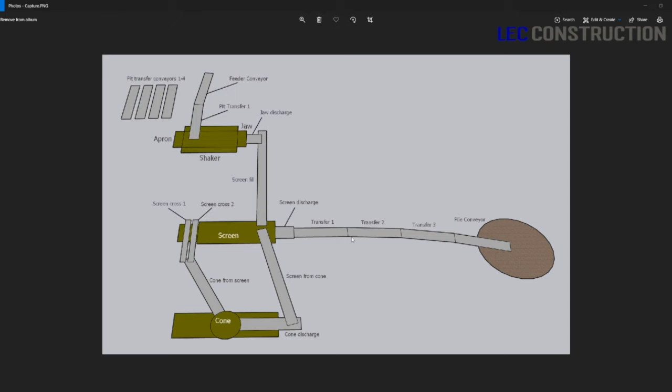Here you can see an overview of our pit setup right now. The only differences are that we don't have the option to add these conveyors yet. All we're doing is dumping directly into the apron feeder and the jaw shaker right here. But eventually we're going to add in the feeder conveyor and then up to 4 transfer conveyors. And then as of right now we only have 2 transfer conveyors here to go out to the pile.

Here's some pictures from actually out at the mine. This is looking from the pile direction. This is the pile conveyor here. And on the left is the cone crusher, in the middle is the screener, and on the right side is the jaw crusher. Here's another kind of more of a side view going down the pile conveyor line.

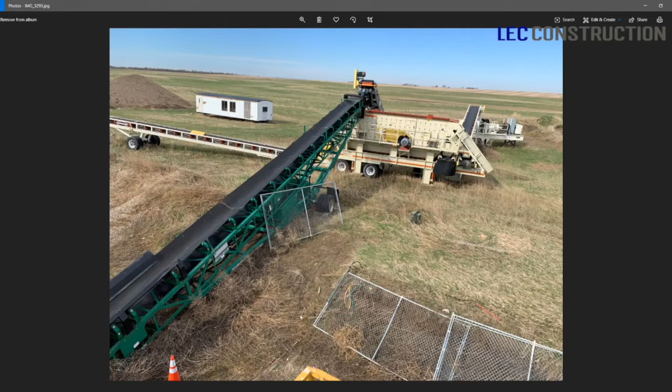And this is looking at the cone crusher here on the left. The conveyor coming out of the cone crusher, going into the screener, and then we have a conveyor coming out of the screener and into the cone. Another side picture on the pile line. And this is looking towards the screener. I'm standing on the jaw crusher, and the cone crusher is on the opposite side here, and we have our job trailer over here.

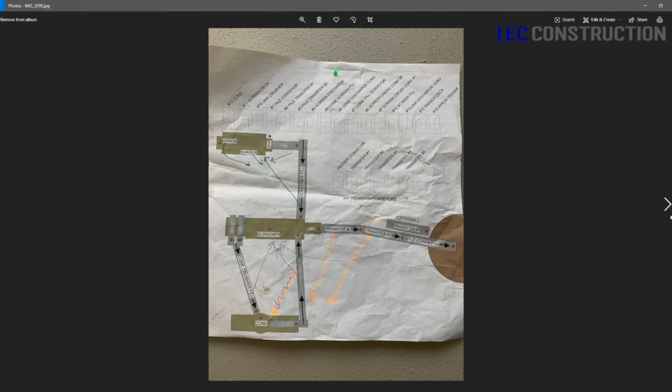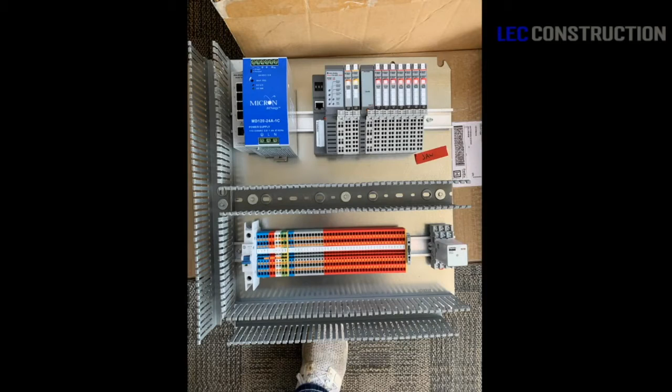This is just a SketchUp of the overview of our gravel pit, and this was a template that was used for one of the cabinets with a bunch of start-stops on it. So when you decide to start a project like this, the first thing you need to do is really just figure out what exactly you want to accomplish. And it varies drastically from one project to another, but we just looked at the hardware that we already had installed out at the mine and decided exactly what we wanted to do.

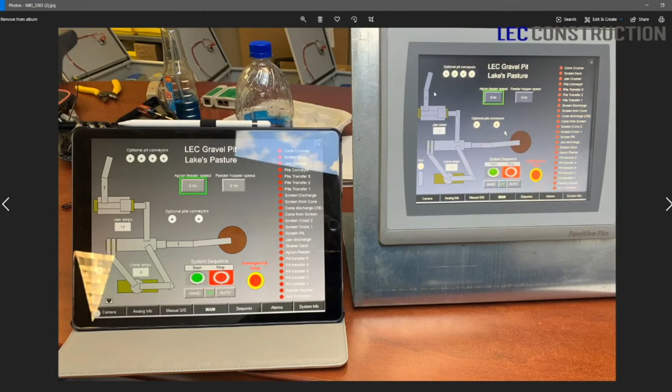And our main goal was to be able to control the pit setup remotely from a wheel loader. And how we decided to do that was with an iPad in the loader, and then a PanelView in the job trailer, and then I just have VNC enabled on the PanelView in order to control it from the loader over a wireless network.

Adding automation to our gravel pit just seemed like a smart choice because we knew that it would make it a more efficient process, and it would just be a more intuitive experience for the operator. The iPad will give our operator an extremely easy way to control and monitor the process and reduce the number of stoppages, and also cut down on the severity of the inevitable stoppages.

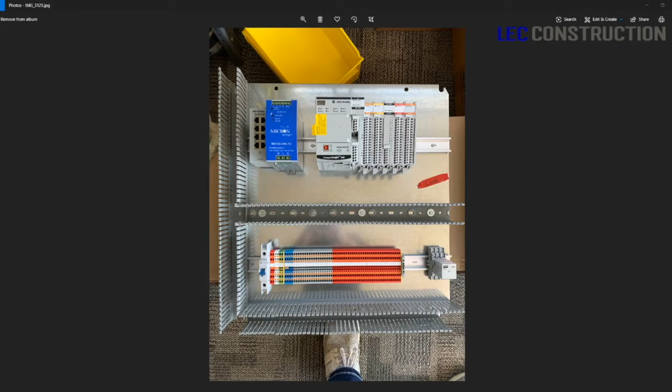After we figured out our main goal for this project, we had to decide on the hardware to complete it. We went with the new 5069 controller from Allen Bradley, and this required buying Studio 5000 since our copy of RSLogix 5000 wouldn't be sufficient. And we also figured out that we needed to place 4 total enclosures by the cone crusher, jaw crusher, screener, and pit conveyor setups. And we decided to go with POINT I/O for the remote racks because they were cheaper and they matched our needs better than the 5069 remote racks.

And as you can see here, I have the main controller. It's a 5069-L306ER, and I just have 2 analog cards here, 2 discrete cards here, and then a field potential distributor, splitting them up since the discrete cards are 120. And I just have a power supply and a switch here, and 1 breaker. I added another one after the fact for 120 volt power. This is for 24, and just a control relay for e-stop power.

And I also decided that I wanted to run every point out to a terminal block, just because it'd be easier to use terminal blocks rather than going directly into the controller every time that you needed to switch something around, and I don't want everybody to have access to possibly messing up the terminals at some point.

And another thing that you really need to consider when you're doing a project like this is enclosure size. As you can see, this one is a little congested, but I definitely wouldn't want it any smaller. But enclosure size is something you really need to consider, because you don't want to pick too small of an enclosure, otherwise you really limit yourself with what you can do in the future without completely going to a bigger enclosure and redesigning your system.

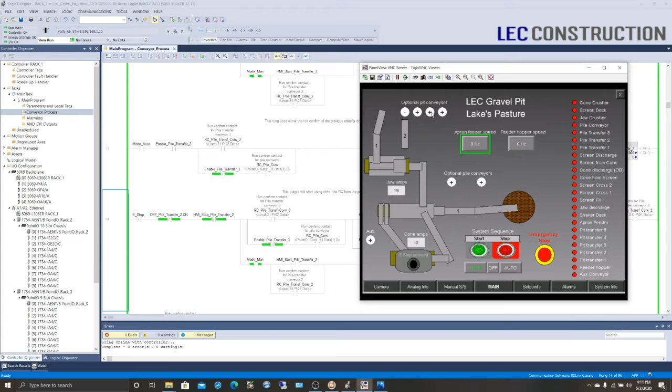After I figured out exactly what we needed for our hardware, I got to work on the programs for the HMI and the PLC. And they both pretty much ended up the way that I wanted them. I had to add the ability to add and subtract optional conveyors in a few different areas. So what I did for that on my HMI was in the pit conveyor setup, you can add up to 4 extra conveyors. You can add up to 2 extra conveyors in the pile conveyor line. And then we have an optional auxiliary conveyor over here that we don't have yet, but we want the ability to add in the future.

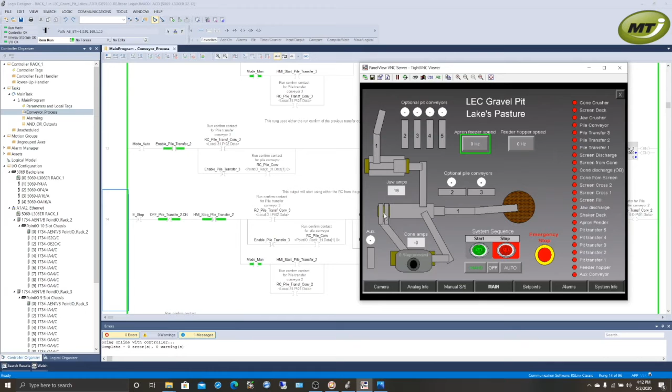And the reason that we'd want to add this auxiliary conveyor is because these 2 cross conveyors can be reconfigured. And right now we just have them set up so they're both feeding into the cone. But if we want to switch them around later and possibly have just an extra rock pile, we can do that, and the auxiliary conveyor will take the pile further away from the screener.

How I did that in my program is I have an enable bit that's controlled by these buttons. So for the pile transfer 2, it would be that bit right there. And it controls whether or not the sequence timer goes. So if you have this conveyor enabled, the timer will go off and it'll start pile transfer conveyor 2. The run confirm from that transfer conveyor will start the timer for transfer 1.

But if that bit is not enabled, as you can see here, it will run off of the pile conveyor run confirm, which is the output before the optional transfer conveyors. And that's how I have it on all of those optional conveyors.

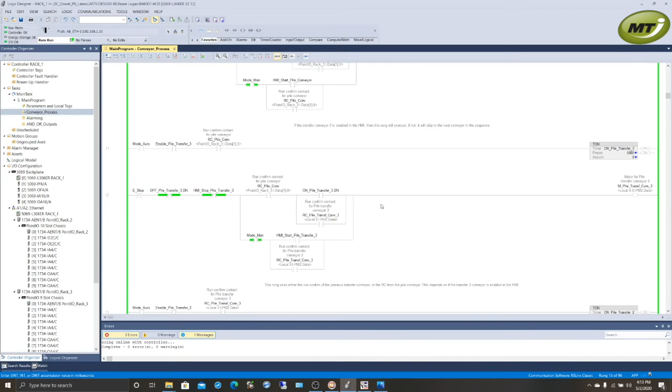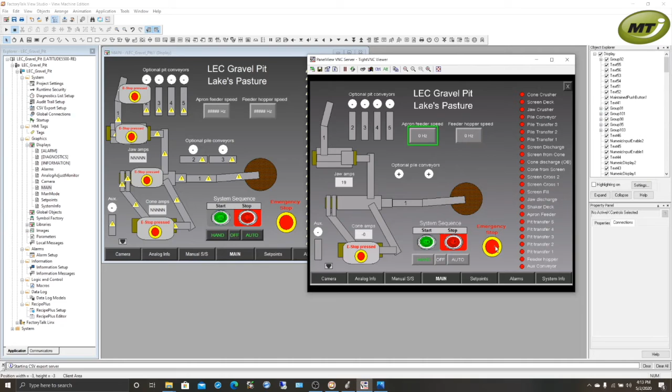Besides that, in my HMI, I've added the ability to stop the outputs from the loader. It's not a true e-stop, but if I press this e-stop, I'll get an alarm that comes up that says e-stop pressed. Obviously it's the HMI e-stop. I can go ahead and reset that. But if I press an e-stop on one of my enclosures, this is what it gives me. I have it programmed so it'll show up an alarm. So right here you can see cone crusher cabinet e-stop pressed. I had already acknowledged it.

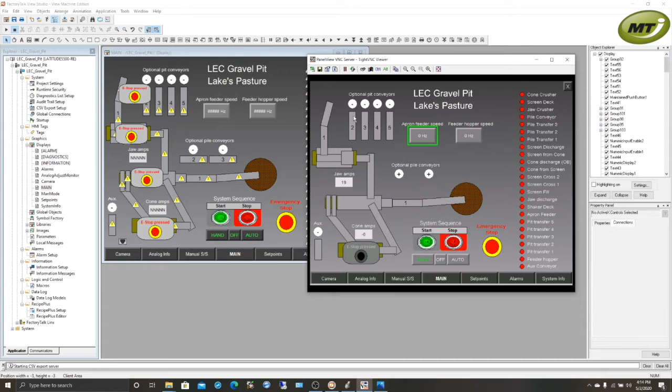And it'll give you a little banner on the actual location that the e-stop was pressed. So in this case, it's on the cone crusher. It could be on the screener or on the jaw crusher, or the pit conveyor control cabinet.

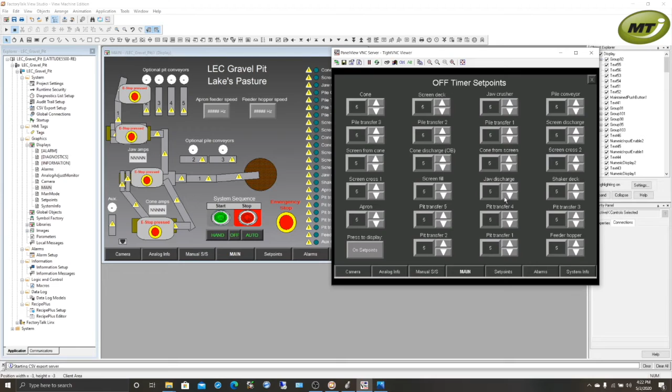Some other areas that I focused in on the HMI: I added the ability to put the system into either auto or manual mode from the main screen. You can also start or stop the system sequence. I've also added the ability to change the on timer and off timer set points for each output. Just a general alarming page. And I've also added a system information page to give the operator a little bit more information about what's going on.

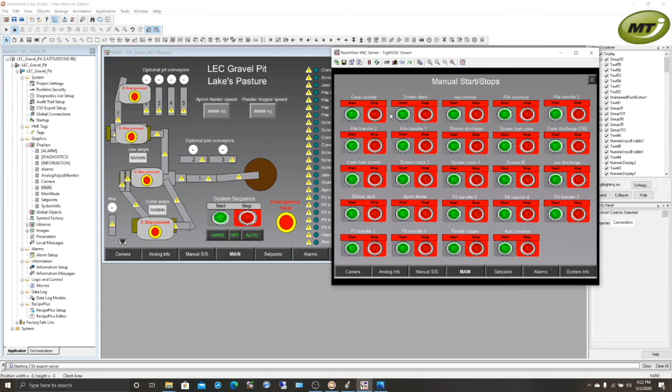If your system is in manual mode, you can go to the manual start stop page and manually control each output. If the output is off, it'll give you this red banner. If it's on, it'll give you a green banner.

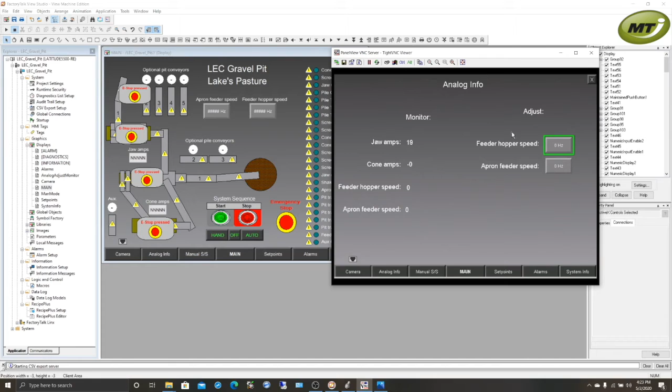I've added an analog info page that gives you a little bit of information about the 4 different analog inputs and outputs we have in the system. And it also gives you the ability to adjust the speed of the 2 VFD controlled outputs. Just click on the field here and you can enter whatever measurement you want. You can also do this on the main page. You've got the speed adjustments here and then the 2 amp meter readings here.

I also added a camera page, but it's currently not running yet because we don't have a camera installed. And then on each page, you probably notice that I have this Ethernet port flashing, and that's just to give the operator a little heads up if he has any connection issues from the HMI to the PLC.

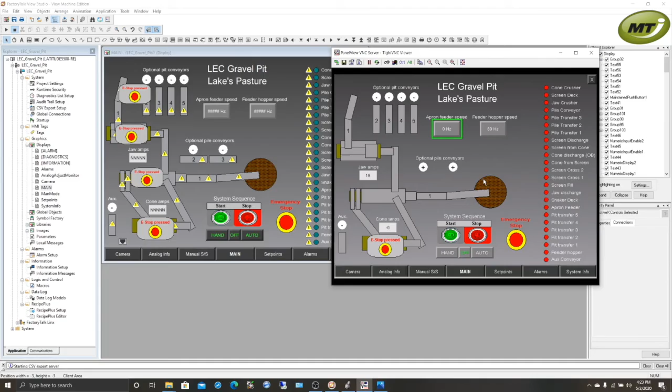One troubleshooting aspect that I added to my HMI would be with overload conditions. If I switch over to FactoryTalk here, go to my main page, you'll see all these caution symbols, and say the overload trips on the screen deck. This caution symbol will come up here, but it'll also pop up on the screen deck itself. So it's just kind of one way to show the operator exactly where the issue is and what it is really.

And also in the sequence, if an overload condition exists before the system starts, obviously the sequence will stop at that point. It won't start the conveyor after it until the current conveyor selected starts. And if it happens during operation, which is obviously when it would normally happen, that output will shut off, but it'll also shut off every output in front of it in line, just so you don't have a pile-up condition where you're starting to bury a conveyor or something like that.

It took a little bit of thinking to finally decide on the setup for HMIs. I thought about using FactoryTalk ViewPoint on an iPad, and then possibly using a Microsoft Surface in the loader as a standalone HMI, or putting a PC in the job trailer with an ME station license. But I ended up deciding to put a PanelView Plus in the job trailer and the iPad in the loader with VNC into the PanelView.

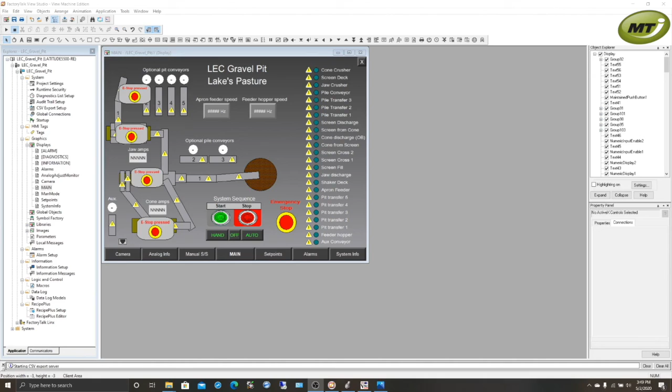The main concern that I have at this point is that my wireless access points aren't going to have a reliable enough connection to keep connection with the iPad and the loader. They're supposed to have a range of 300 feet, clear line of sight, and I don't know whether or not the connection is going to be reliable enough. It'll take a lot of testing, but I just hope we don't have to move to a radio connection instead.

And I could go on and on, honestly, but that pretty much sums my project up. It was a great experience to be able to build a project from scratch and oversee the entire thing. And it's probably the best learning experience I could have had. And I can't wait to get it all wired into our existing setup and fine-tune it to exactly what we need.